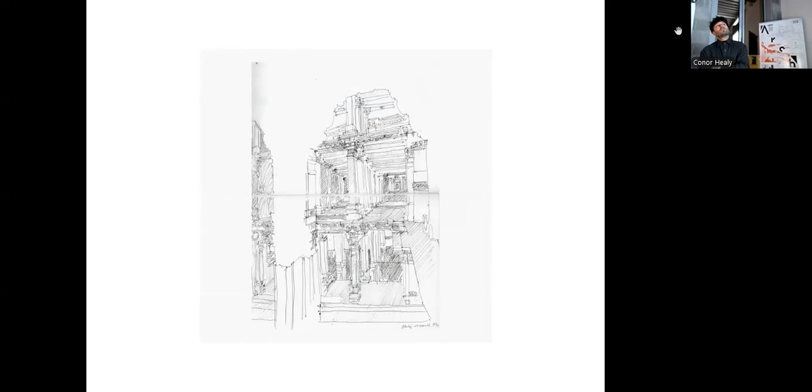In school, in the 4th year, we also had a discipline that was history, for which we had to make a sketchbook of drawings. With the sketchbook, it was mandatory to draw Romanic and Gothic examples of architecture through Portugal.

I took this always as an exercise, even when abroad, to bring the sketchbook and to draw. So this part of drawing was also part of the process, almost inherent to the way I was approaching architecture, falling in love with the idea of capturing what I was seeing through drawing.

Eventually, I ended up teaching. This is a photograph of Bangkok in the year of 15, Thailand. It was super great to have the opportunity to go to Asia and teach there, another totally different panorama, another way of looking at the same discipline of architecture. This vibrant city also offered opportunities to travel around, a win-win situation.

To run the office and stay there for a semester, no going and coming, meeting a lot of super interesting people from different contexts again, a melting pot of ideas. When you have a review, everybody has a totally different approach to the same project. For me it was a mind-opening moment, because in the faculty you have a way of doing things, and Porto is quite strict with drawing, with the precision of hand drawing. It was very good for me to flip it around again.

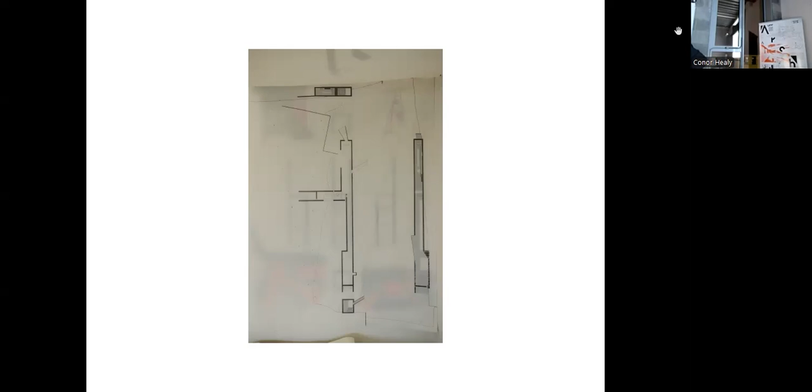When you teach, what I get at least is that I have to always be sharp and aware of a project that appears in front of me, and somehow say something clever that helps the student go on their path. To be engaged with 24 different projects per year is also a way of creating systems, creating methods of thinking.

Last year I was in Mendrisio teaching first year, with a small atelier of 12 students run by Valerio Olgiati. It was again a moment of ultra discomfort, to understand another way of teaching through an idea and not through a process, as in FAUP.

This is one of my first clients, a very tall, nice person called Antonio. Antonio asked me for a small room, and this is how things start. What I'd like to share is that there's no just one way of doing things or running a practice or starting something. It just starts one day, one commission, another commission, and then you end up focusing on designing and building, learning along the way.

This is a small room - we needed a living room for a house that had a succession of spaces but no living room. So I created this space, about 210, and this is 4 meters, that's the skylight. I always like to show the photograph of the person because he's quite tall, but he allowed me to do whatever, to think about the project in a very free way.

I was also spoiled by the first sites that I found - they were very special. For example, this one, the size of this plot is super big, that's why we could build over here until this line, and it reaches the river. Spending time at the building site makes things better, to visit the building and also to experiment, as I'll show you afterwards, in what we did in this house.

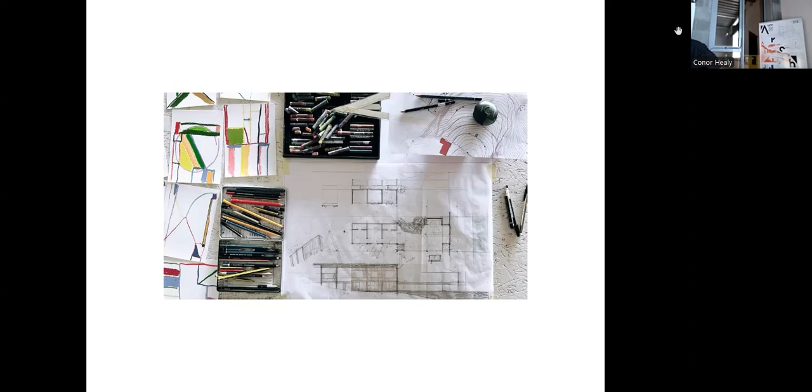I still draw as I drew back at the faculty, and you saw me drafting up there. Then we crossed this, and a lot of other drawings - these I call mind catchers. It's a bit like having a small bunch of lines that coincide and are about an idea, just enough to pull a string and then develop that idea.

Then we also use AutoCAD and make the matrix of houses.

This is a doorless house for a couple with 3 children, who wanted a house without doors inside. So it's a progression of chambers that compress into a living room without a corner, then develops towards a courtyard, and the living room faces the diagonal line of a wall that protects it. All the houses face the house through the backyard, containing it this way.

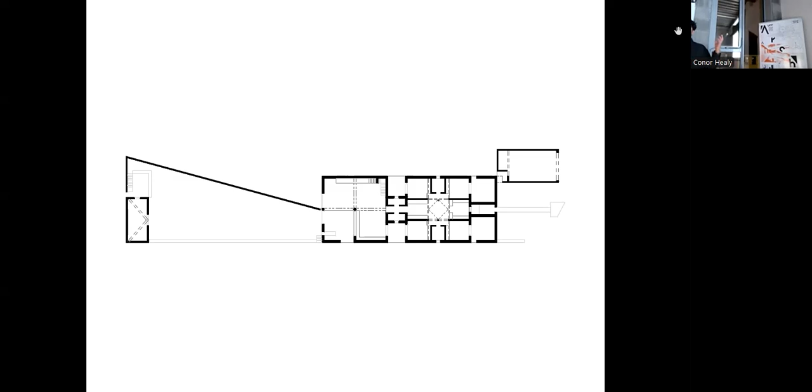But not to talk about the house, but to talk about matrix. So it's a black line that then you precise how wide, how tall, how spaces are. And then, of course, a lot of models, 1 to 20 models.

This is a bird watching tower. There is the same client that wanted a small cave. So outside you only have this fireplace with a small reception area, and then an inside cabanon.

So to work with all of this, we then cross these ideas with realistic renderings. I have very good friends that share the space with me, the same guys we were putting shows together, making festivals. They are now doing amazing renderings, and with these renderings, we test everything: the pivoted panels to ventilate the space, the finishing of a floor, the skylight, the texture of concrete.

And then it's crossed again with hand drawings. That is almost like when you leave your head melting ideas that are crossed again with interiors and other images. With these images, I really try to see the end mile of the project already in the first phase.

Also to try to grasp the attention of the viewer, of the client, in order to submit a final result that can be changed during the construction, and resemble other solutions. This is the house.

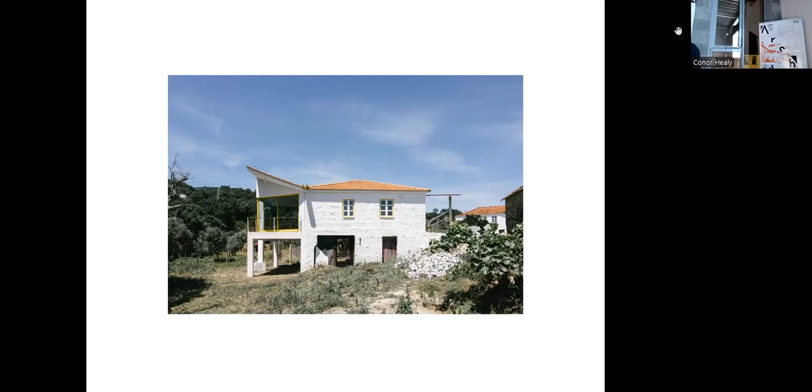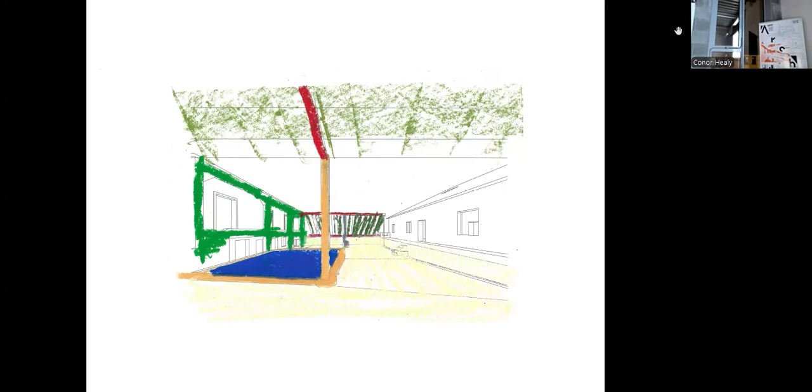And this is the process. Sometimes it's also like this: you print a very dull line from the 3D engine, and then you sketch on top of it just to show how materiality would evolve within these drawings.

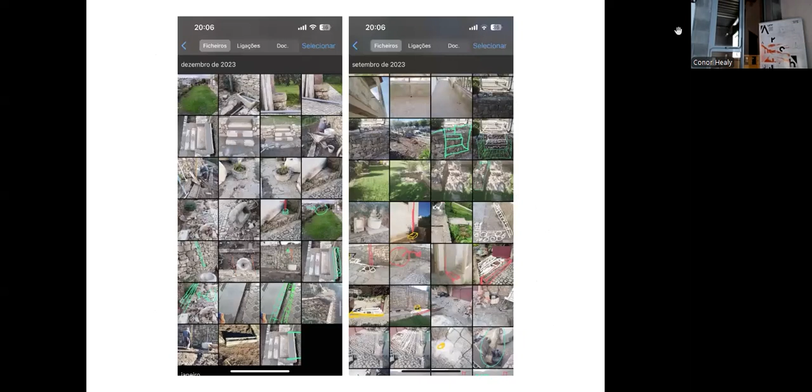And then you move to the building site, and the site has a lot of this, a lot of WhatsApps with annotations and exchanges with clients, because you cannot go there every regular day. And then this becomes a new tool of operations.

So just to say it's not an envelope that you give and then you wait for things to happen. You have to be on top of it, you have to fight a lot, and then you receive images, these are quite recent, of works on the garden.

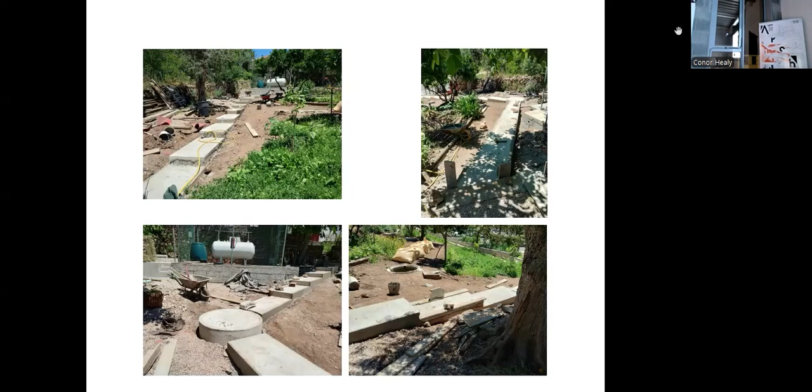This friend of mine is a DJ, super enthusiastic also. Sometimes it's very difficult to grasp everything he has to say about the project and the expectations. But at least, as you can see, there's a lot of exchange of ideas and things to correct.

And you're allowed to draw on walls because you're the architect. When you're here, you cannot do it because it's forbidden to do it in your home. And now I can do it in somebody else's home. Afterwards, this is all painted white and covered, and it kind of disappears. But for a moment, I can visit the building site and use a wall as a canvas.

And the workers, they arrive there in the morning and they look like a crazy architect, but they don't even try to argue about it. And then this also translates into other things and other operations that are done through the buildings.

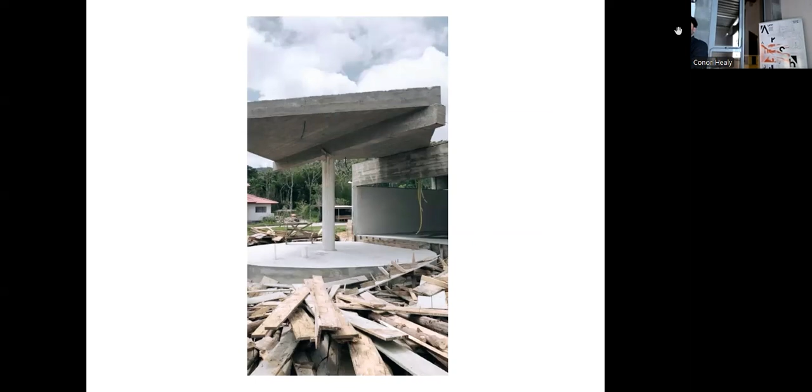This is another photograph of a house done in Brazil, full of WhatsApp exchanges. Incredibly, it came out better than expected considering how distant it was. I just visited this house this February, almost 2 years after completion, and we can find similarities and disparities.

But that doesn't matter a lot, because these are just mind catchers, just intentions on things. Some of them already exist, some will exist, some won't exist, but it's really food for the brain.

So I really like to think about the atelier and the practice as something very hybrid. I don't say that this is not organized, I don't say that this is out of place, it's like it is what it is. The drawings are spread around, the models and things are also pinned on the wall, as you do it in the faculty.

So these transitions, I think, at least for me, this is a safe haven. And none of this would be possible without Diogo and Anna. So if I'm here now, it's because they are really pushing, exchanging and trying to do the best we can. We are also super small. I've been working alone for a long time. I hired Diogo a couple of years ago, and Anna came along also like 1.5 or 2 years ago. Now we have Formiga, who is Luis, with us for the last month. So it's a very small operation, not a corporation. We just do our best.

So I like very much this image from Calder, saying that this is his mind spread all around. It's splattered and scattered all around the studio.

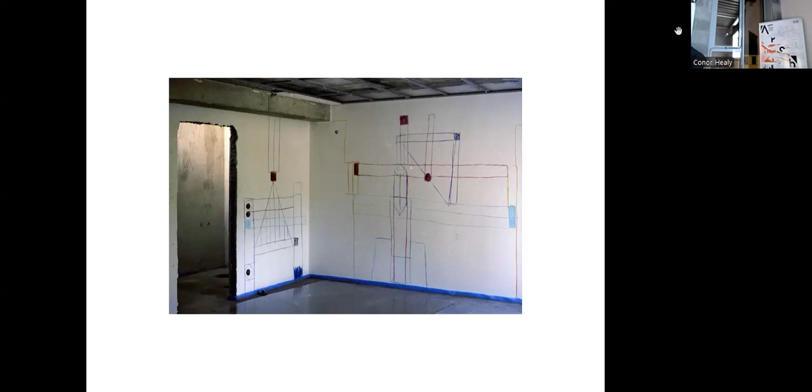And in the end, this is how it goes, as a full circle. You draw, you think, you visit, you fail, and then you fail again, and then you near miss it, and then you think that you did it, and then afterwards you fail again. And it's been the path for the past 12 years.

So I started a project which was a very happy project, the way that we learned a lot with this. As you see, this is the plot, the model for the plot, and the first idea, the intention of placing a rock, placing a building as one element on this topography.

And this is the relation that we have with the river. This was so immeasurable, so big, the plot, that we didn't have any kind of reference. For example, today I was with Sean in the first year, Sarah and Adam for the review, and it is a super hard first exercise, because you have a context and you have to deal with the corner situation.

We have to come up with the program. And this site is also very hard because you don't have anything to grasp. It's just a huge land. You don't want to spoil it, you don't want to break anything.

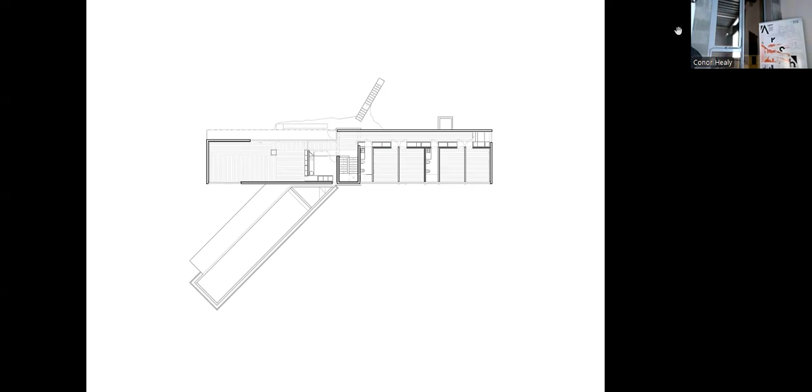So our intention was to create a narrow, long house with a social area, a kitchen, a staircase that will work as a structural element right in the middle of the house, and then rooms facing a glass facade, 2 toilets, and 1 corridor facing the rocks, and 1 balcony on this side facing the other rocks. This is the ground level plan with a 45-degree swimming pool.

This will be totally impossible to build today because this is a 2014 project. Right now, prices are totally insane, as I also had the chance to know that here it's the same.

This kind of experimentation with 45-degree test concrete was made on site. These boards, some of them are like 16 meters long. They were being lifted and put in place, and it was like 3 men for 1 year and something building this house with a lot of time. And this is how we do it.

There's some naivety with the house because we did it almost as prefab concrete, so almost like the pieces are being dropped on top of each other. And it should be like when you open a marble stone and you want to match the lines of the marble. This is also a granite area very near the quarries.

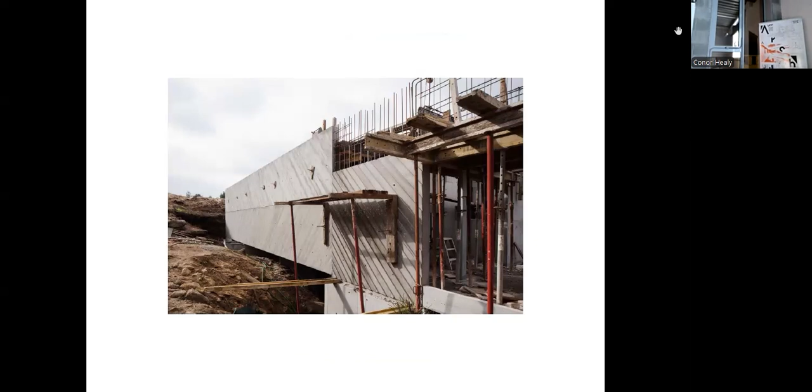So this is how it works. You have one piece that will be casted, then it will be cut, and then another piece will just fall on top of this. This is how the puzzle looks in a way that it's not just a single texture, but it's a game of scale too.

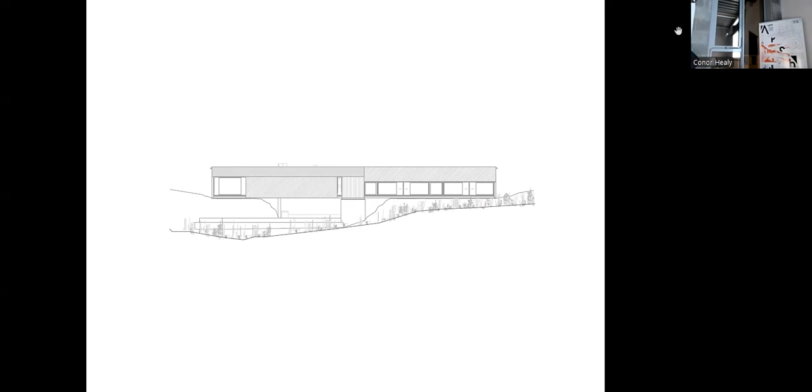From the top level, the cover is also in concrete slates, 40 by 60. When you approach the house, it looks half hidden, half sunk, half on top, and half. Again, like this image of an obelisk that I don't know if you've ever seen. If you Google it, you'll find an obelisk that was not completed, and it's there, but you don't understand if it's something that was put there or if it was discovered.

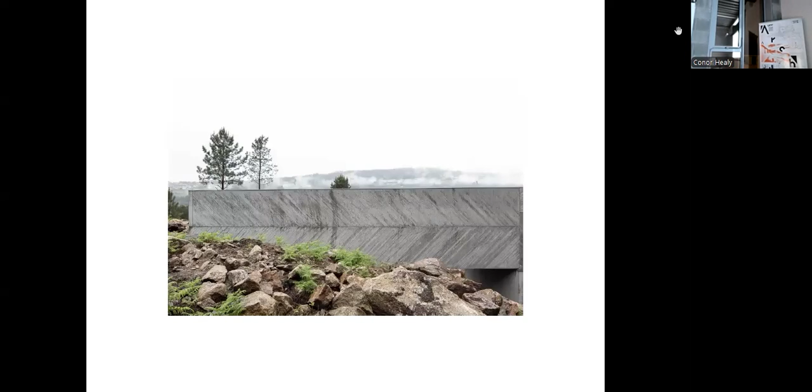So this is how you approach the house. You see the balcony, then this texture confrontation with the rocks that were already there, which was very, very important to us. Also, the fact that we took almost 4 years to complete this house gave time to the site itself to start grabbing the building, falling on top of the building.

And this is the view from the office. Then there's this relationship between the volume column that is there, that is also the shower for the pool, the barbecue area facing the rocks, and then this situation of a steep topography where this has to kind of spread arms and legs to attach to it.

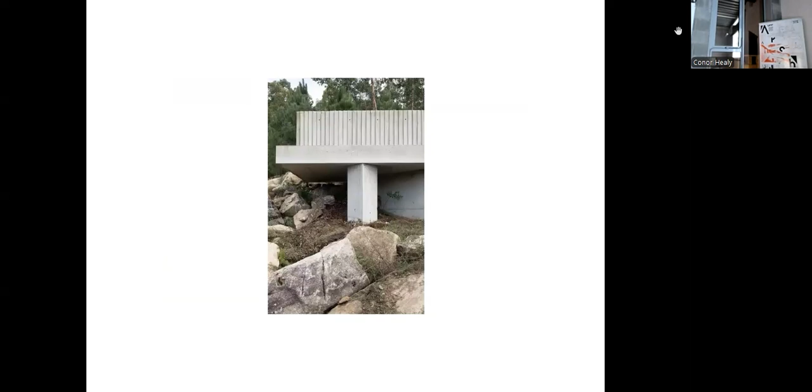This is the swimming pool, which had this too. We also tried this kind of stereotomy, rotated in a way that the water kind of follows the concrete beam, parallel to it. There's a beautiful mist in this area, which is quite evocative to the house.

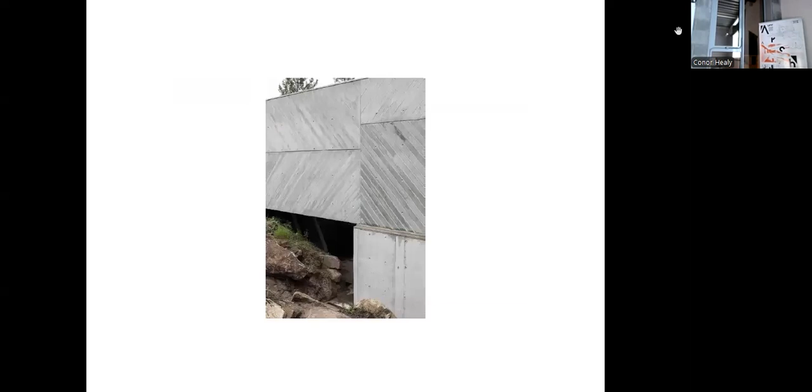And this is the best part, when it starts to kind of melt with the context. This is the view from the lower end where you almost don't see the pool on the left, but you see this monolith over there with a very narrow window.

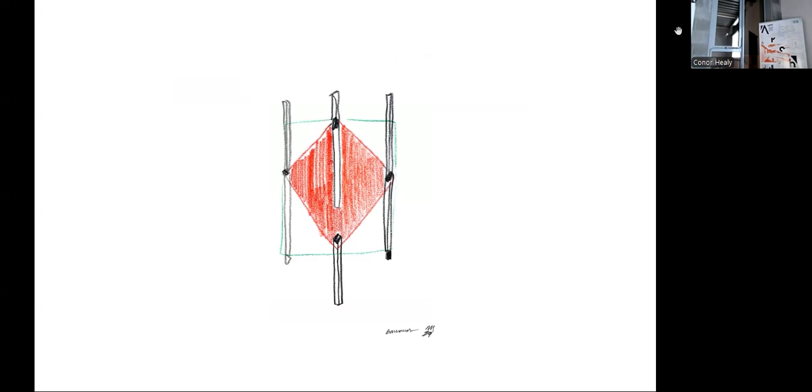And here, every once in a while, to also shape things a little bit, there are competitions. I try to do one per year or one every 2 years. This one was a total failure — out of 100, we were in 93 or 94. But for me, it was a very happy moment. I really enjoyed this chapel. It's a mortuary chapel near a graveyard, and it was very complex.

This is the plot that has this beautiful view, and we didn't want to touch the plot. It's a rocky area, so we wanted to dig those rocks, allow the rock to be part of the interior, and we wanted to create an element that didn't have any kind of orientation, so it was also not Catholic — there was no religion towards it.

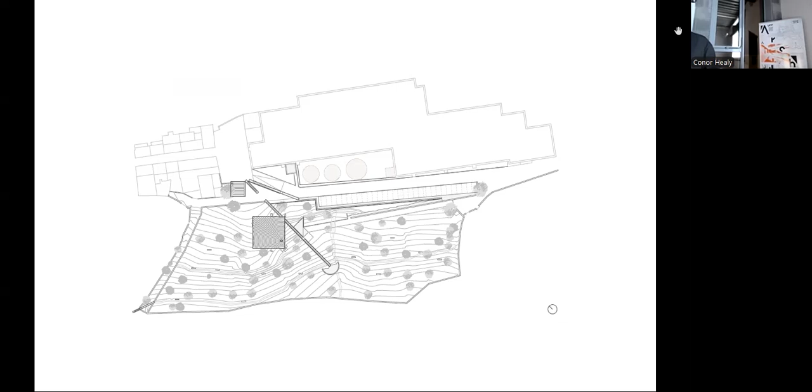So we somehow created a succession of elements. When you come here, you have a stand, then you walk down the procession, turn, and enter a cave-like structure. This is one of them. We also did only 2 images for the competition, none of the overall building, because our friends didn't have time. So I said, okay, let's go with the artistic one.

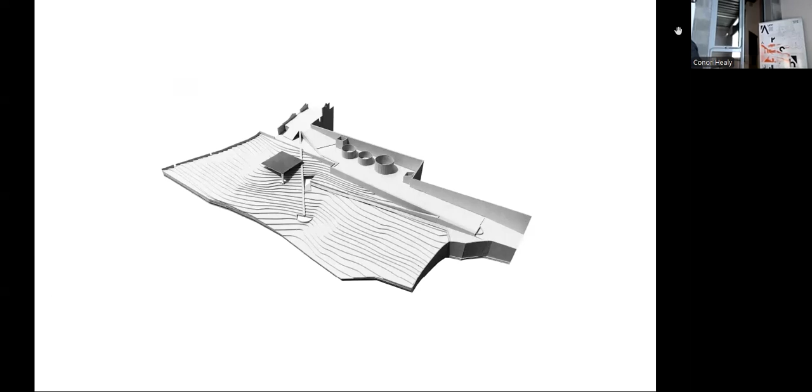So this is the horizontal plane that would capture the water as it is over there. And then there's a diagonal straight down if you'd like to take the shortcut, near the edge. And then just one pillar, and this line that is not touching the other side - this is the so-called promenade that you follow.

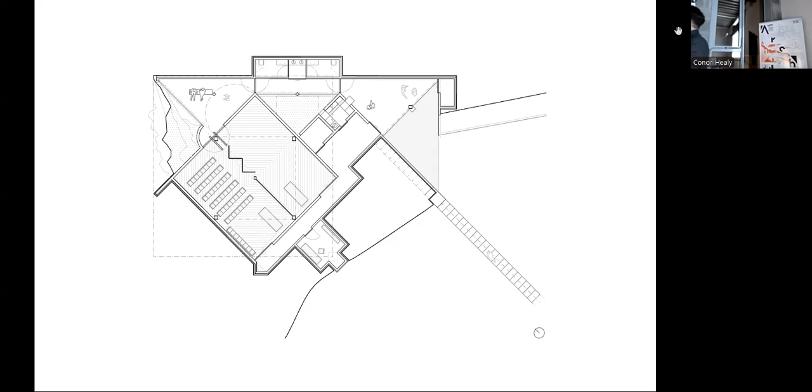And then once you enter here, you have a covered area, a compression zone with the toilets, and then a courtyard, a waiting area, so you can wait before you enter and mourn somebody inside this room. And the room needed to be one or two rooms - it could be split in half.

So this is how it works when you slide the doors. And then once you're here, you're underground, looking only out to the sky with a hole with water dripping from the top, and you lose any sense of which north or south you're really facing.

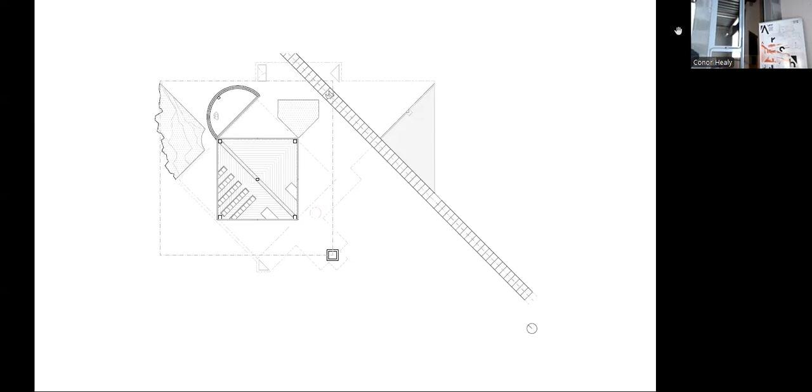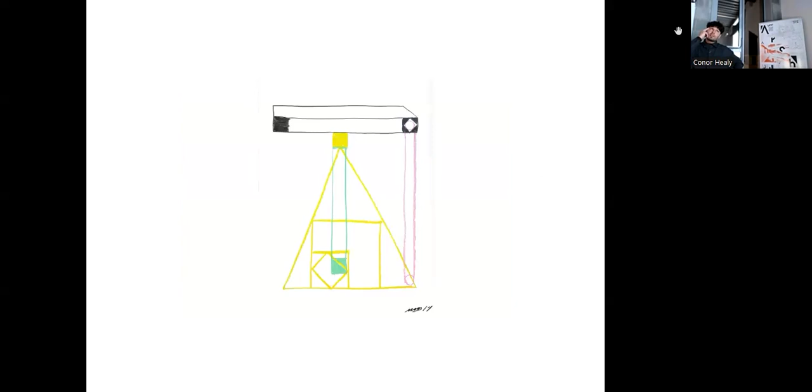And a lot of times we are surprised by how interesting and eager to do something our clients are.

This is a story of a small shed. This is a masonry building that he was already rebuilding. As you can see here, he is already building a small toilet, ventilation for the toilets. And he asked me to place here a wooden box, just a wooden box on top of this.

And I told him, I don't know how to do just wooden boxes, so if you allow me to think a little bit, I might come up with something. So as this was made by him - you call it aparelho de pedra - the masonry work was not so nice, it was very rough. So I also didn't want to take authorship in the way the stones were being laid. So I came up with this idea of creating a portico outside and leaning a roof that is also tensioned with the existence, but it's not really touching.

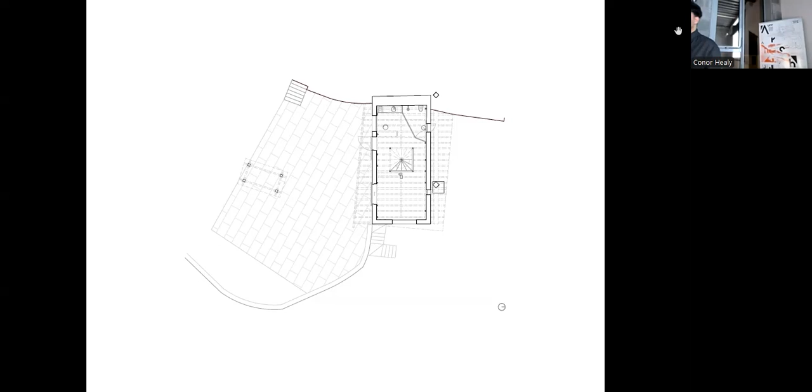So we will keep the very thick stone walls on the ground level, a staircase in the middle, small toilets and kitchenette, and living over here with a drier area for the corn, used to be the most exposed area. And in section it will be like this.

So the huge discussion was not only the height, but also the distance of the frame towards the interior, because in the end the client was always questioning if he was just paying for an expensive corridor in the upper level. But once it started getting built, and once I saw this beam over there, I felt like, okay, this would be a beautiful ruin - if we don't finish the building, it's already super nice.

And the interesting thing is that I presented this work on a Friday night because he was very busy. He came there with the couple. They saw the project, saw some references, the ideas, and he got a good feeling about it.

Monday he was calling me asking if the plans were correct, and I told him, yeah, the plans are, I took some measures, and he said okay, because today I'm starting to build it. So he asked how to say father-in-law, like the father of the wife. So the father-in-law started building it with another guy.

Going, casting everything, very, very artisanal, very local. And then he contracted the carpenter that usually did the carpentry works on this site.

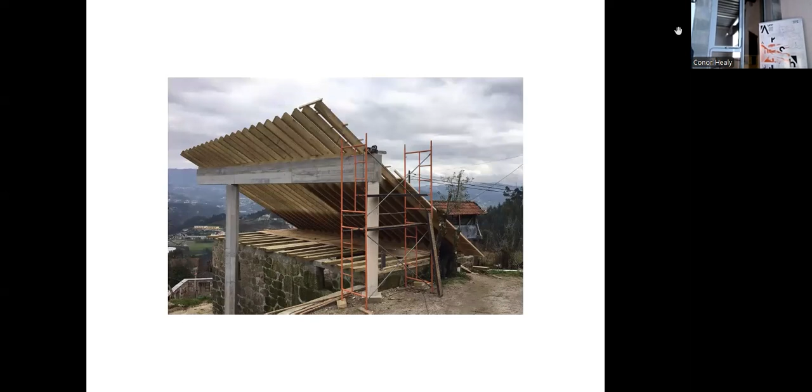It is a work done and carried out by small structures, which I really like. This is when we finished the roof.

And then this is how you approach it. So you come from this higher end, you see the column, the beam, pulling you out to the left, and then the roof is not totally parallel. So there's also a tension game on this point of the vanishing line, so it like pushes you there.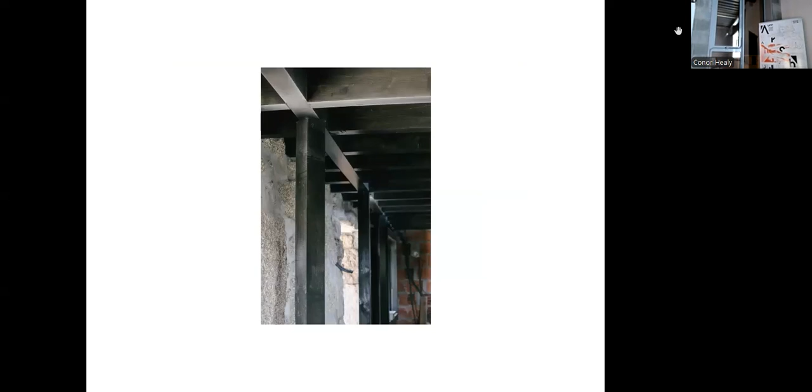And then this is the lower area where the frames are made with these beams. So we cut all these beams, we made these huge frames that were attached to the masonry wall. And the structure, as you can see, doesn't touch the granite. So it's almost like a raft that is there in between the granite walls.

And here you can see the frames, how they are attached to the exterior. So when you're on the outside, the ground level still looks like it was a ruin. And these are sketches for the waterproofing layer with the metrics and all that.

And then the guy got there with a huge gas bottle, and he told me, you're just crazy. I'm just going to do it parallel to each other, one on top of the other. And this was the result in the water gutter there, and how it looks from the lower side.

The window, which is also a metric for the facade, drawing about it, and how it looks from this side, like the port. So from one side, it's very domestic, very up to our scale. You even have, if you're very tall, you have to kind of go under the water gutter. And on this side, it gets a monumentality that it's not very common in this kind of structures.

This is a house in the countryside. So where I work, it's 30 kilometers from Porto, so it's not really the city center. And a lot of these projects are with local contractors that you have to negotiate finishings, negotiate how the building will end up.

And this is the house for my accountant. One of these days, he appeared there with the paper, with the plots, and said, would you design my house? I said, of course, yeah, I just want the things, of course I will.

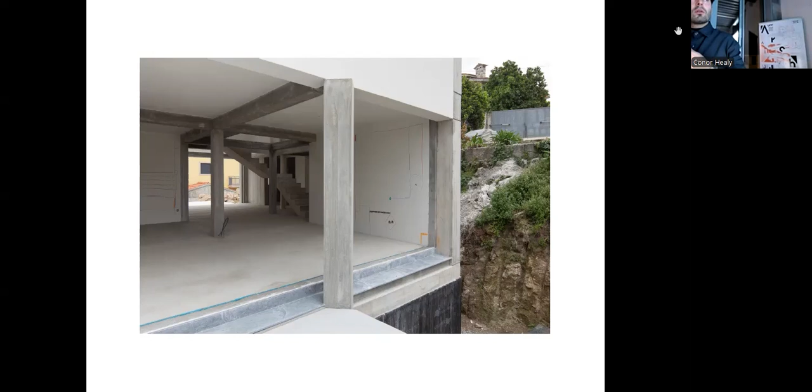So I convinced him to have an umbrella, an exterior umbrella for the cars and also to receive us when we arrive there. And the frame of the house, the skeleton of the house, the staircase, these elements that are drifted here, even if you would change the floor, paint the wall in yellow, these would still be there and still be containing space. So this was the main intention.

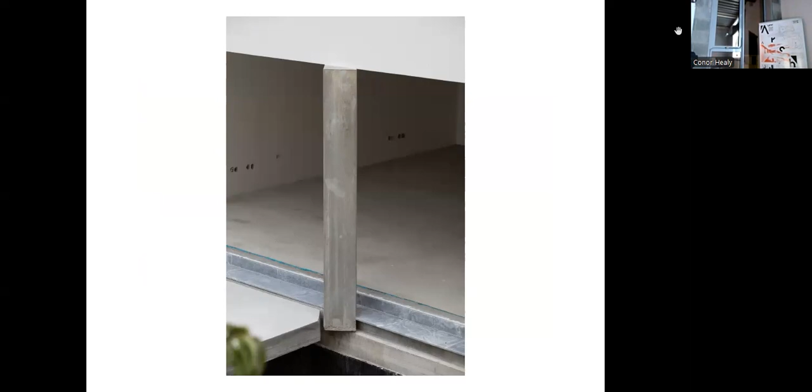And this is how it looks from the entrance. I have the vertical stair there, the living room, from the dining to the living to the kitchen on the left.

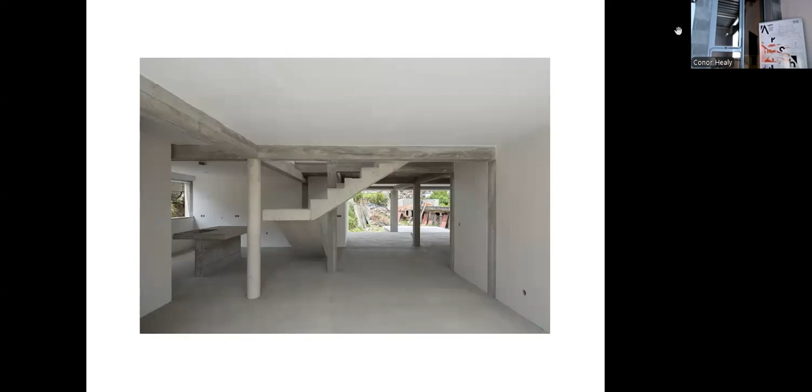And this is a triple height space in the core of the house that allows one to get from the ground level to the upper level, always communicating and talking and looking at the ground floor.

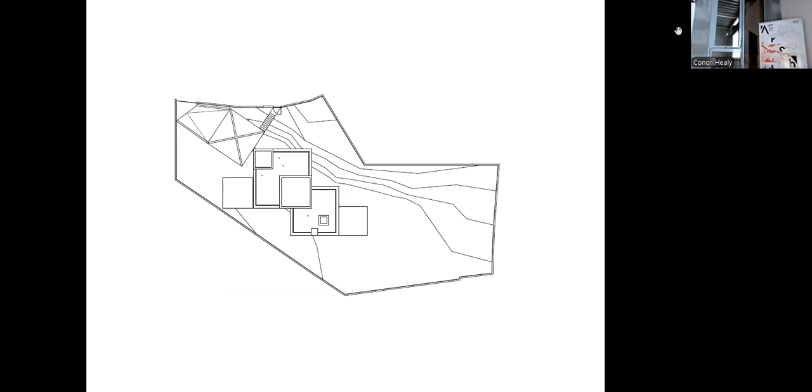Plan-wise, you see that it's quite complicated. Actually, this was one plot that they managed to cut in two to then get this house over there. So this is 3 meters, 5 meters there, and it's a cascade, like a waterfall falling through the plot. So you get there, you have a small exterior chamber.

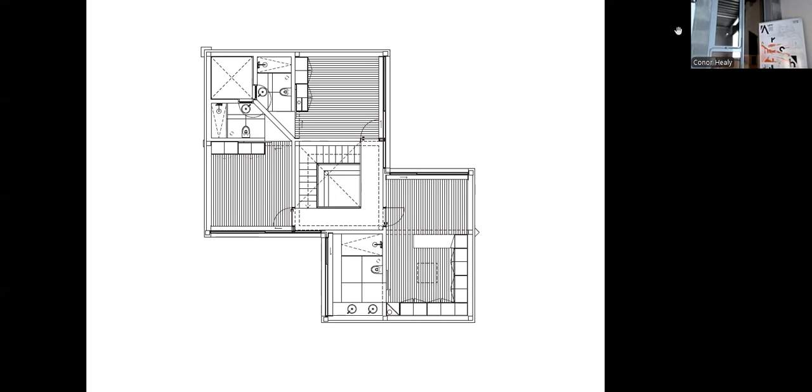You enter here, you take your coat, you put on your slippers, you take your shoes out, and then you get in. Then you have the dining, kitchen, living, and on the upper level you go up the stairs, and it's very simple: two twin rooms facing this hollow space in the entrance, and then the master bedroom. This is how it looks.

And there was a coincidence. This was about to be the frame for the doors, in this material. But the electrician made a mistake—it should have been 20, instead it was 10. So I had to do this on site. We took this, and rotated it until there was a margin. So now it kind of looks like legs and fingers framing the doors.

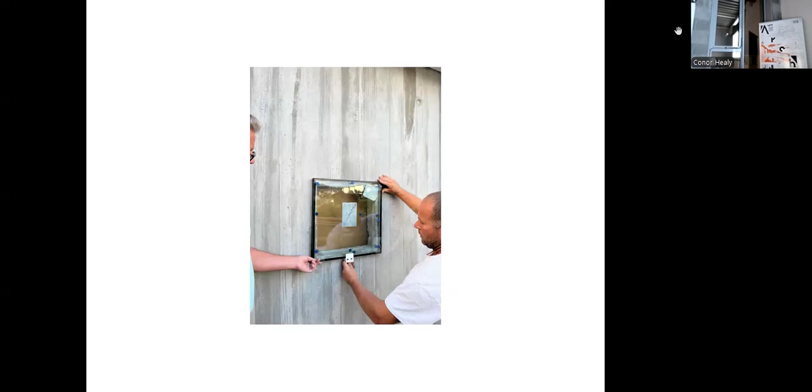All these processes, I'm always speaking about learning, because you can draw things, but better than drawing is to be with the carpenter, be with the smithsman, be with the contractor, which is Senor Isidro who is here—also there's a story for him. And being with brave people that allow you to make this frame that is just on top of the concrete wall with the neoprene sealing, and also with the carpenter so we could test on site.

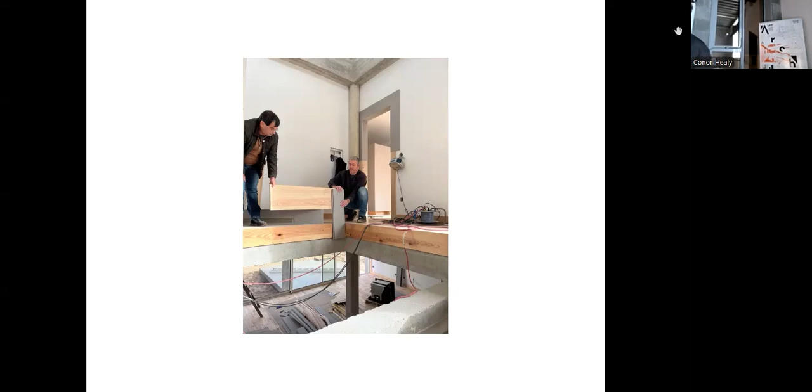We tested a lot this handrail, because I didn't want it to be super heavy, but it also should not be in glass, because this was not meant to be made of glass. So it was a very difficult task. And the house from the outside looks quite opaque, but there's a lot of light inside.

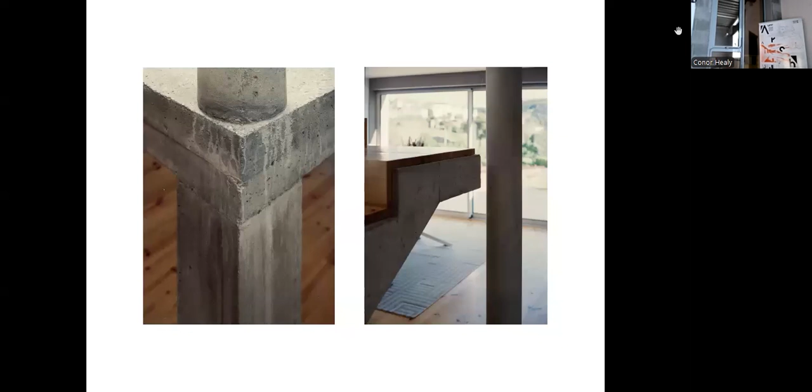And then here you can see the context of the small farming outside, with the topography that was arranged to receive the house on this side, and then the scattered context. My friend Pedro took these beautiful photographs of small details within the house, of carpentry works and metal works, and the relationships between materials, the skylights, the water gutter.

And so too is the house for the same contractor of this previous house. In the very beginning, I was looking at the project, not understanding much about it. I also didn't have a big feeling—I didn't feel like it was going in a good way.

And this guy, in the end, really liked the house, and he bought another plot in front of this one, and he asked me for another nephew's project—a house for another nephew, because he was the uncle of this client. Then I designed that house, and eventually he told me, let's see another plot, and now I want you to design my own house.

And this was also a very interesting process, because he's living on the opposite side of this building site in an apartment. So every day he would come to the veranda and look at the building, how it was being built. He was controlling the other contractor he hired to build his own house.

And he told me, you should design everything—sofa, bed, everything—because I want to leave everything that I own. I will live in this apartment, probably I will rent it, and then you should design everything.

So as a house, the plan is like this: a square, subdivided. The social eating, cooking, is one axis of the house, and then there's another axis on this side. Two courtyards, one covered, one uncovered, and then two rooms.

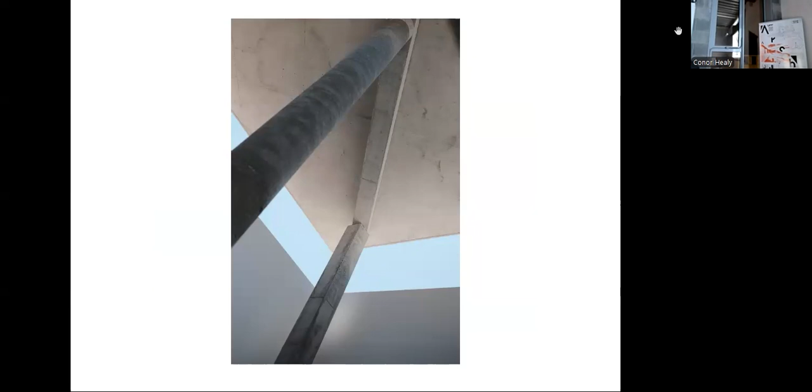And this is how the umbrella works and operates to this first space, which is the exterior lobby. It's a 6-meter high umbrella where you reach there. It also rains there, and this is the place where we also connect to the basement, which is the same square with the access from behind, where he keeps his contractor materials.

And inside the house, yeah, this is the section. So you see the column going right down there, crossing the whole ground floor, and corner of one of the courtyards. And then the whole house is lifted from the floor.

So it's a bit like a box that you open the 4 sides for 4 different verandas. And you enter through here, through the courtyard on the left, with the ceiling. And then you can see through. You see the small chaise longue, which is a bed, the dining area here, and then the grid.

And the concrete works were quite awful. I was actually going to assume them as not so even, not so horizontal. And then we came up with this idea of doing instead of having it on the floor, we had it on the top, to lift and to also work with all the sliding doors with the same detail.

This is the toilet on this side that has the window, so you allow one to see how is the ceiling. This is the dining area with the double heights. Then the transition to the room on that side, and then the 2 columns that also create an informal corridor, which is really not a corridor, the so-called office-slash-sleeping area, which has a sliding door over there.

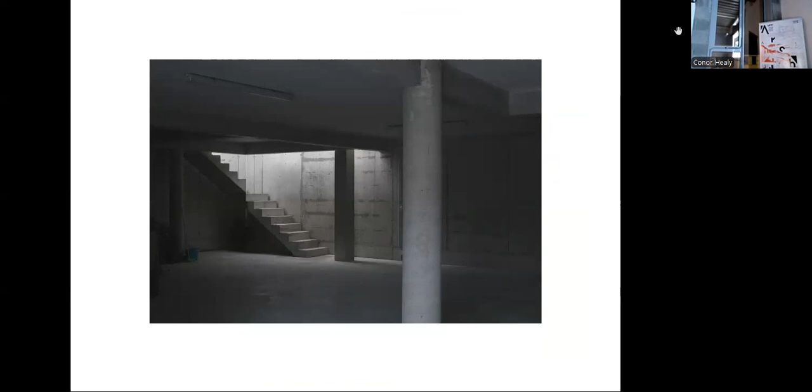And to finish this talk, this lecture, I finish with one project that is the biggest that I've done so far, that we are finishing now in construction. It's a small flagship store for a local company.

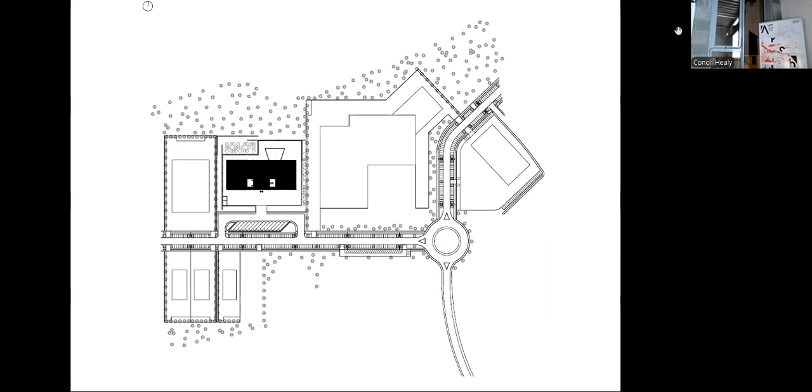They sell, and they are very niche. So what they do is sell equipment for changing tires, aligning directions, so it's like heavy weight materials that are going to be stored, repaired, and they're located in a showroom, office area, shop, and then storage on the back. So this is the model that we've done for the project.

So it will be a portico, a gallery. There was a 9-meter difference from this side to that side. So one enters here and can walk through this, enter each one of the cores, and then get down the stair on the other side, or through the stair in the front.

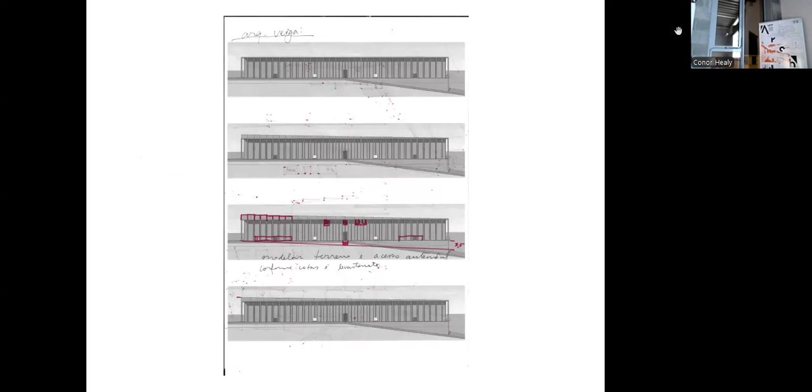This is the land movement that we have to do. So in order to make it less expensive, move less soil, we created these walls made of stone inside, so like these caged stone walls to contain this, and these are the studies for the facade, studies for the rhythm of this portico, and also to try to solve this connection between the base of the building and how it could be modulated, and then sketches and ideas for the main area.

This is the first rendering of the access with a snake tongue to provide two entrances for the building. These were the first sketches where you can see the core, so like the shop with 4 working rooms, 2 courtyards, 2 main halls that allow one also to perceive the building through the interior.

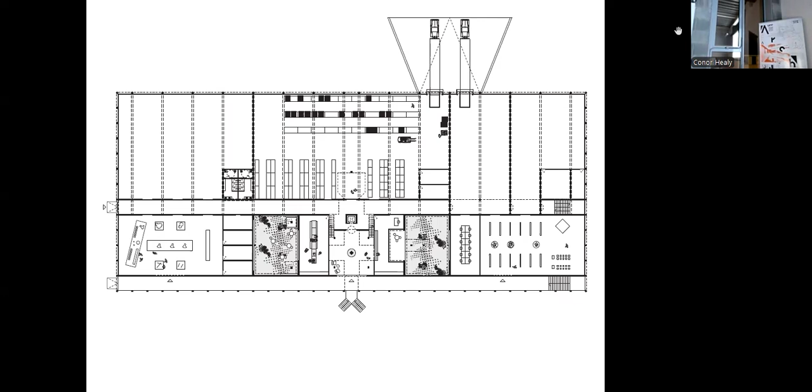Then the cafeteria, working area, and then we'll go up and face this cross passage where you can wait, then the administration room, and the other room for workers on the upper level, as you see here in the plan. There will also be a meeting room facing the warehouse, then this cross, and small balconies facing each side of the courtyards.

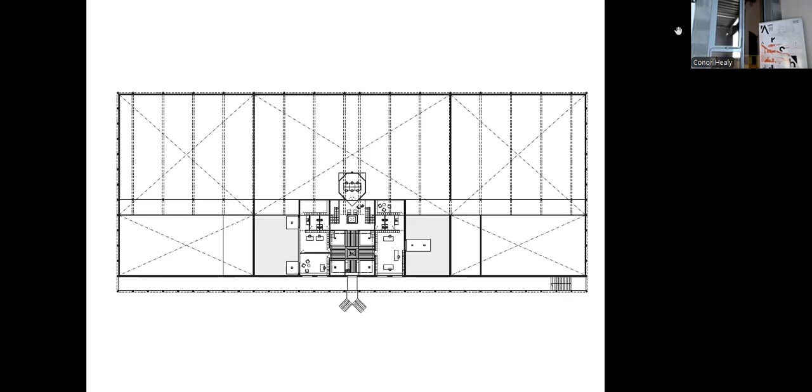Eventually we had to give up on this idea of having a control room. It was very expensive because of the fireproofing, so this had to be a different category and split from these cores. It would be super expensive to have glass that resists 60 minutes of fire.

To build this in prefab concrete is a lot of process of understanding a new building technology that I never built with, but the cleverest way of building this was to work with a company for the prefab.

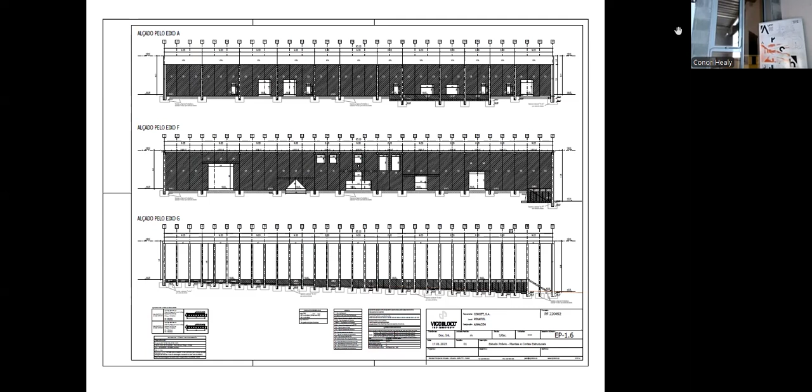So we did like 16 reviews of their system, and every time we could, we tried to shift a bit the parameters, the so-called standard, to keep the standard price but do it in a different way. These were sketches for the panels - insulated, not insulated, simple panels.

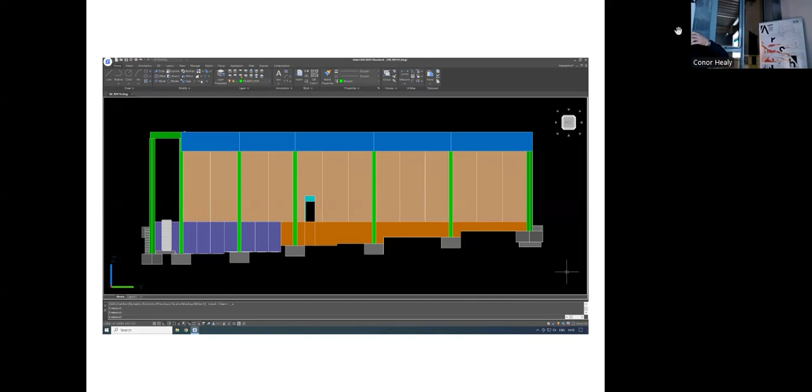And how then to decode the elements - taller columns, beams. This is 2 meters high, so to understand that we are mostly this size, quite heavy, quite impressive. And this is the feet of the building.

So the number of little, almost like a centipede, little feet of the building that will be dug into the ground to sustain all these elements that will build like a Lego.

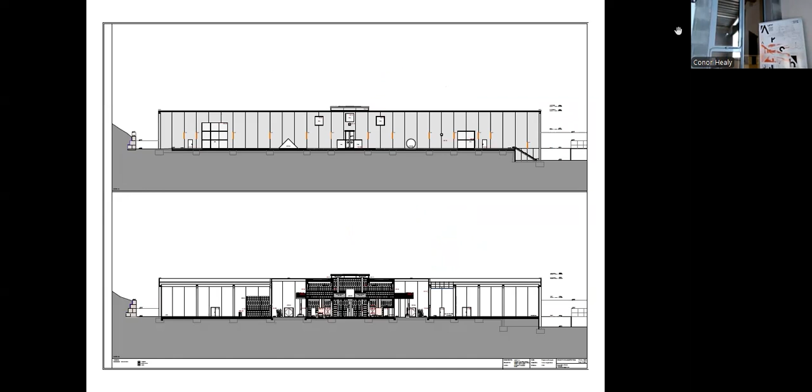These are the final plans of the upstairs. Inside, there were other kinds of functions that we didn't do with the prefab, so we just used brick and created small sculptures inside the building.

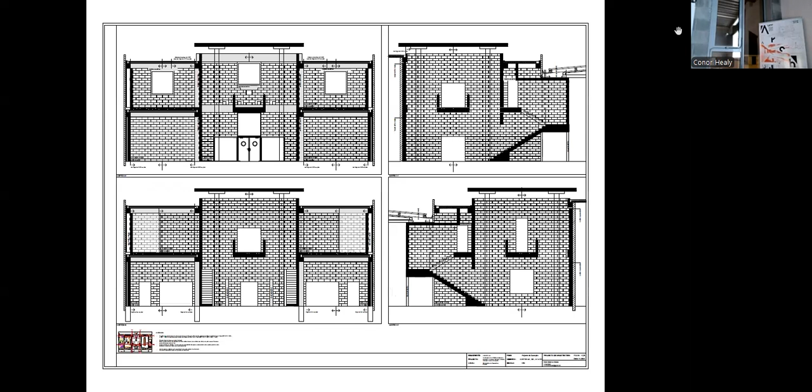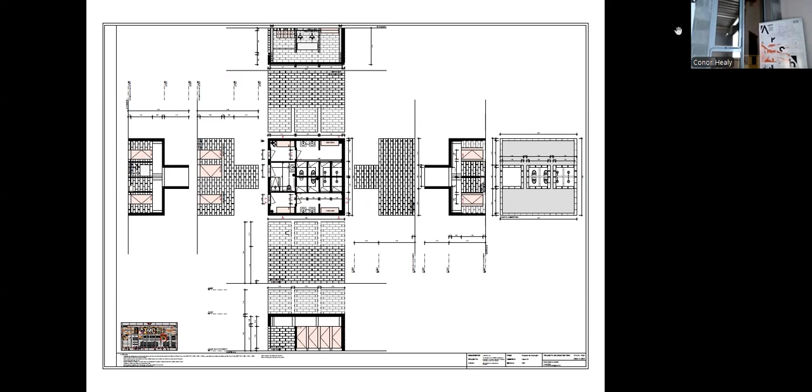For every box we tried to be as synthetic as possible, also not to scare the contractor, so this wouldn't become too expensive. And every one of them has interior skylights that allow the light from the ceiling to reach.

One of the last ones to be drawn was the driver's small toilet, only with a throne inside, placed over here. So the driver comes here and says, I have to go to the toilet, so it goes here. And then he has a 6 meter high tube, which is open upstairs.

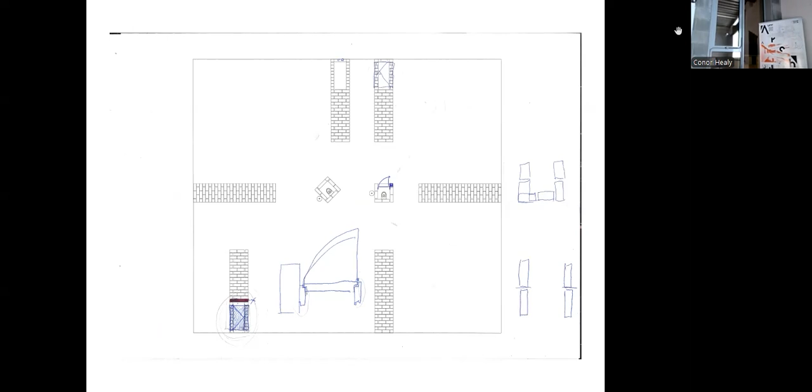So sometimes this can get funny - people allow you to do the things you want to do. No, but this is very serious. This is very serious.

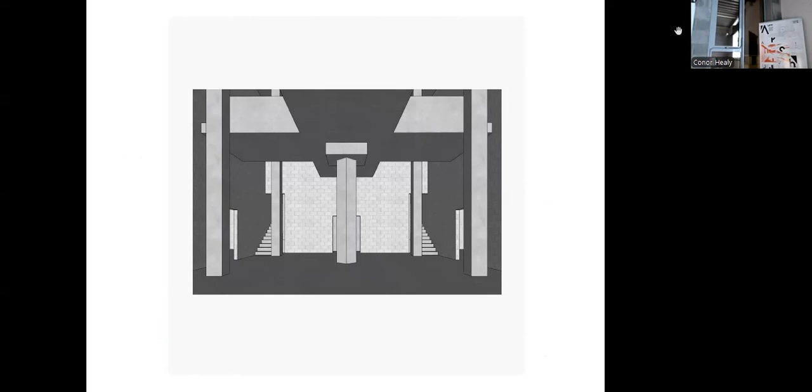So this is the lobby, one of the renderings we were making. You enter, you have the gaps, then the two staircases that lead you upstairs. These were the skylight locations on the ceiling, the walls that we were making to contain.

And this was the system - I had never also worked with this. It was quite interesting to learn more.

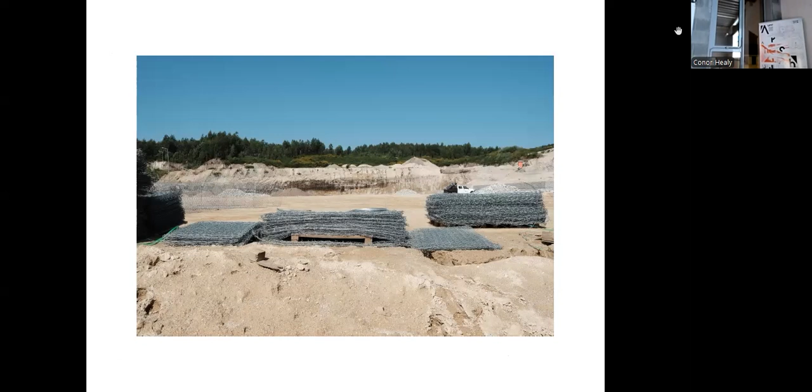And then the site for the structure and how this structure started to bring together. It was always impressive, even for the client, because it's super fast to be assembled, so he could see the building growing in a very fast way.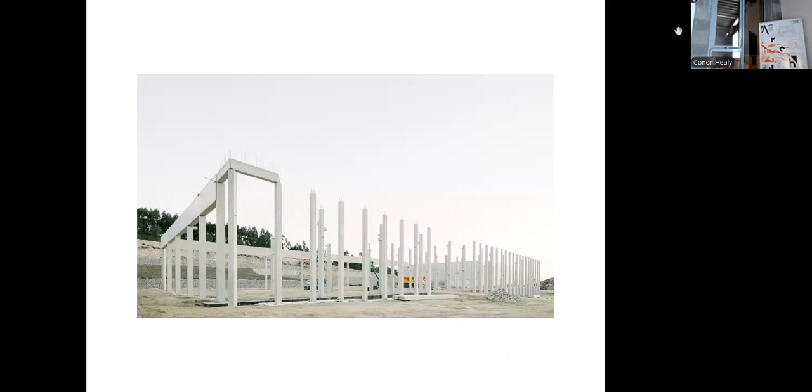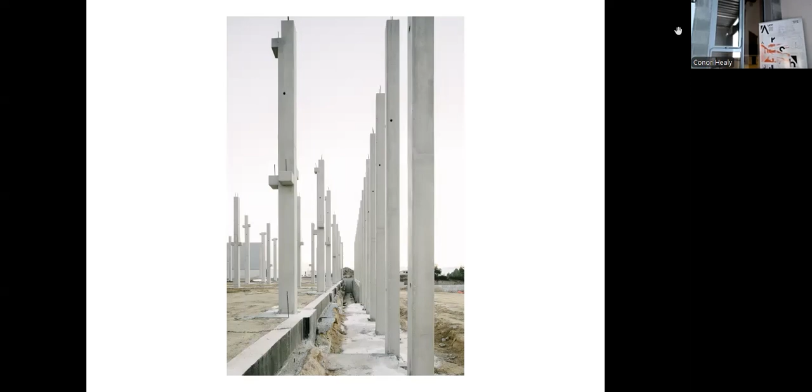And then once he saw the columns, he said, 'Oh my God, this is going to be quite huge, and it's going to be interesting and impactful.' It was also part of the brief. This is a super serious company and they are passing the testimony from the father to the sons, and they say, 'We don't want any metallic, random warehouse. We would like to have something with a bit more care.' So they allowed us to push it to this level.

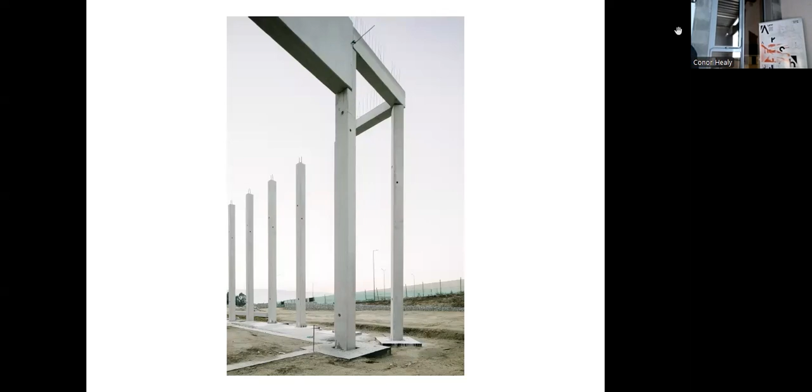This is on the lower level. All the photographs that we've been seeing in this presentation are from José Campos, the photographer that I worked with for a very long time. These were photographs that we took at like 6 a.m. or 5:45, with the first light of the day, just going in there to take them.

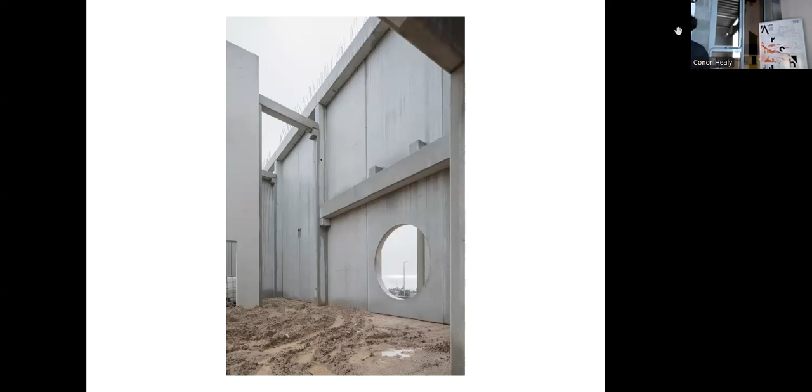And here it's being assembled with the courtyard, with the circular void, with these super cool beams that will hold this panel. We had to learn a lot about how these things were going to be shifted and stitched together so that it becomes a building, not something disconnected. There were a couple of engineers I consulted before, and they said you don't want to work with prefab because you always want to control everything, and if you do it with prefab, it's going to destroy your idea. But we were lucky enough to change these elements, to adapt them and do these variations.

And here you can perceive the scale of one panel towards one person. It's also a misty area, so it helps a lot with the atmosphere of the building. And once the skeleton was made and we only had this dirt floor, it was already super impactful to understand how to look through this and how this monolith was appearing on the site.

The relationship with the topography was quite steep and difficult. The gallery appearing over here with the porticado and the colonnade, and the more technical area behind, the staircase to access the gallery, this repetition of elements.

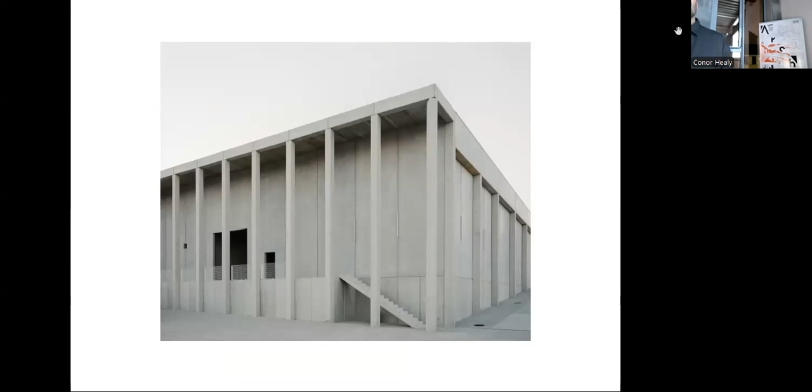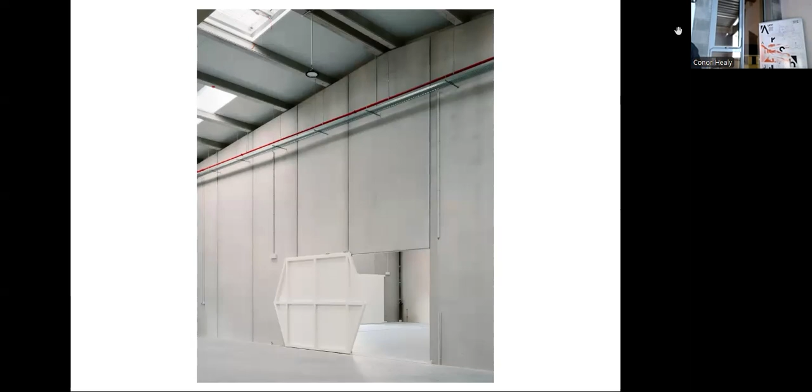We did a lot of work where everything is on site, so you cannot hide anything. It's all on top of the concrete. All these solutions for lighting, water, and HVAC, we had to plan in advance. And the metal works — we were very lucky with our metalworker Anselmo, who does everything he can to provide for the work. This is the dripped brick, just painted white. We just leave the bottom in connection to the floor.